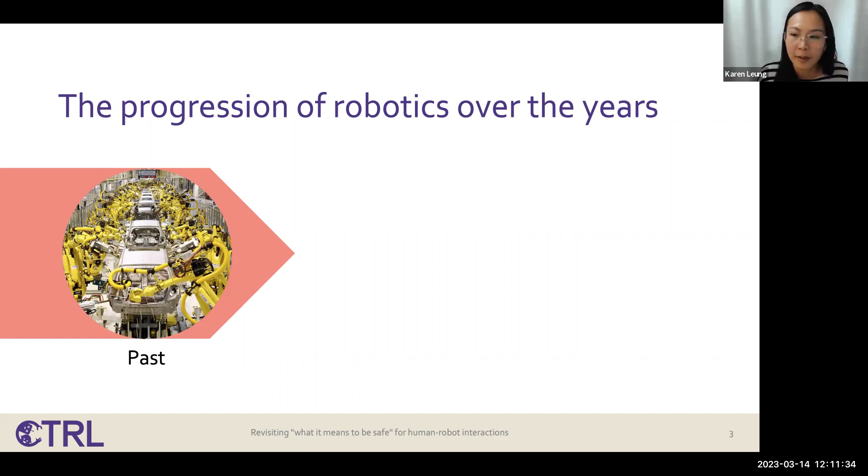And so I'm going to start with a slide that lots of robotics PhD defenses have had for the past couple of years, including my own: the progression of robotics over the years. Before, you see these massive robotic arms on the factory floor that are caged in, preventing any humans from entering. Now we see that they are operating near humans. I would say they're not necessarily operating in close proximity and interacting with humans, but they're definitely sharing the same space. But the task is still to stay sufficiently far away from the human, but follow them, perhaps, in the case of this probably Skydio drone or something.

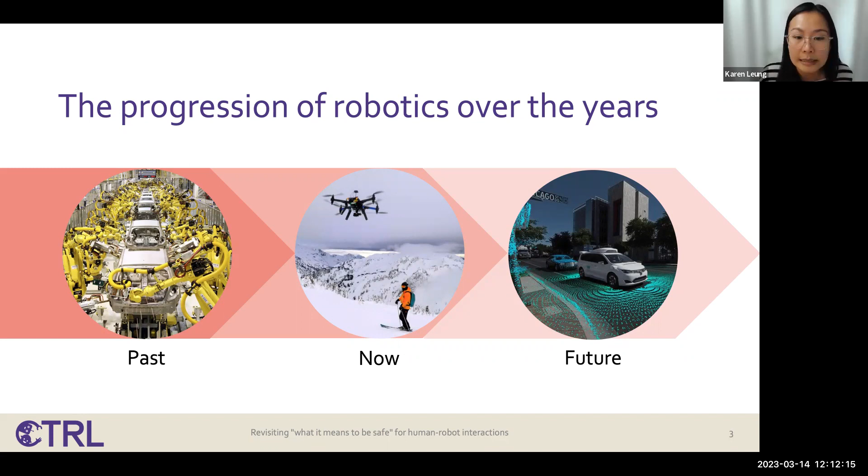But now, of course, as we move to the next generation, the next wave of robots, we want them to operate very close to humans. For example, in autonomous driving, we want autonomous cars interacting with human drivers and pedestrians and cyclists and so forth. So what does the next generation of robots need to have, or need to do, right? They need to operate in uncertain environments, interact with humans, and perform a variety of tasks. Again, these are probably things that you're all very familiar with.

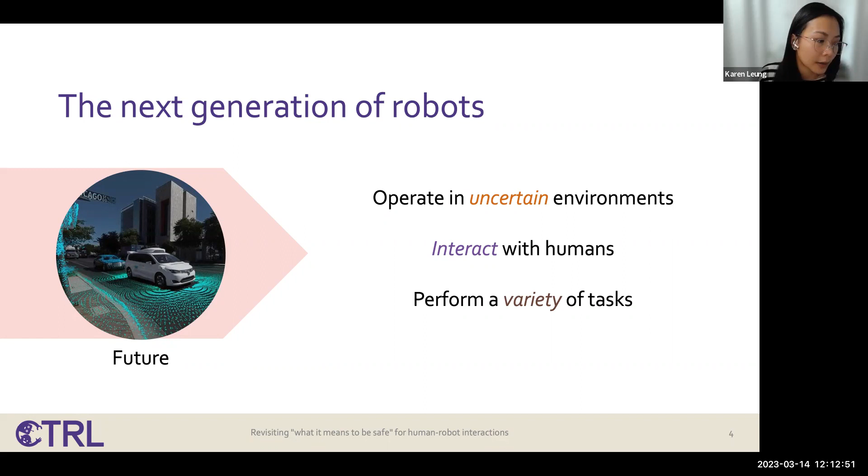And to put a bit more context to how I'm approaching this problem of designing the next generation of robots that can do these 3 things, I'm really approaching it through the prediction, planning, and control stack. So I'm not really going to touch on perception at all. But I'm assuming that within the autonomy stack, there are these 3 main modules: the prediction module, which needs to somehow predict how humans or the environment are going to evolve. This prediction is then fed into the planning module, which figures out a good path or trajectory for the robot to take, accounting for how the human might behave. And then this plan is passed into some low-level controller, which will track this trajectory as best as possible.

And so with this in mind, there are 2 questions I want to focus on in this talk. The first is, where does safety come in, right? Within these 3 modules, who should be responsible for ensuring safety? Should it be the prediction model, whose job is to be as accurate as possible? And if that's very accurate, then everything downstream shouldn't need to worry too much? Or should it be the planner that is taking these predictions and accounting for how humans behave? And if the planner is fully responsible for ensuring safe plans, then the controller just needs to blindly track whatever the planner wants to do.

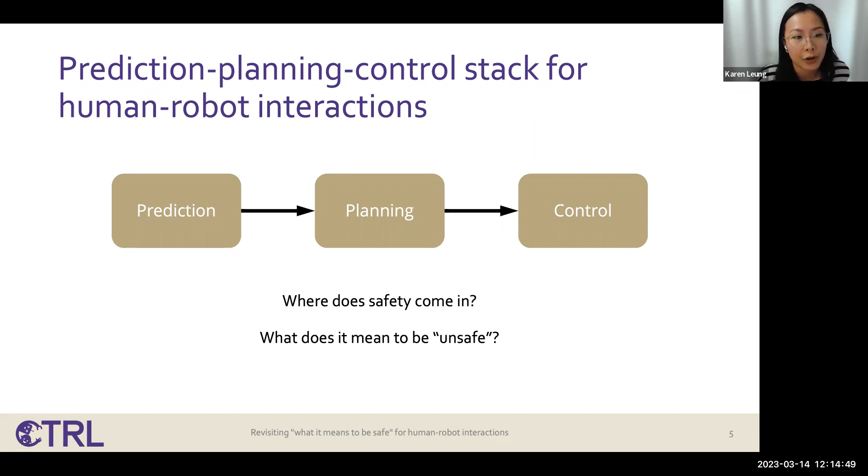Or should it be the controller that is really aware of these high fidelity dynamics, that is really able to understand the dynamic capabilities of your robot? Should it be the controller that is in charge of being safe? However, the controller is unable to fully reason about the uncertainty and the complexity of this shared human-robot environment. So the first question is actually, in my mind, not super trivial. It's actually not clear where safety comes in. Maybe the blanket answer is that it should come in everywhere, but maybe the question is how. And then the second question is, what does it mean to be unsafe? As I said at the very beginning, safety can no longer mean keep three meters away from everyone, right?

So what does it mean to be safe? Or alternatively, what does it mean to be unsafe? Because ultimately, you're going to have humans in the environment. When you're driving on the road, you actually drive very close to other cars. And so in some sense, you might think that is unsafe, but there is this level of trust or assumption that you have for other drivers to not collide into you.

And so the question is, where do you draw that line between, this other driver's gonna swerve into you, or they're actually gonna drive responsibly and stay in their lane. And so these are the two questions I want to explore.

Are there any questions so far? No, yeah, I'm good so far. Yeah, okay. It sounds a lot like the kind of conversations we've had within our lab. The different people in our lab are working on different parts of these three phases. Okay, awesome. That's good to hear.

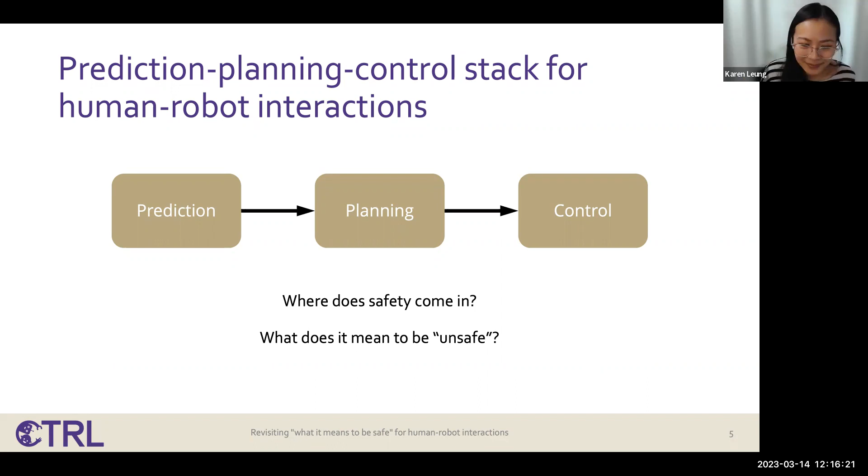Okay, so the roadmap here. So again, I'm going to talk about these two questions. So the first half is, where does safety come in? So I'll give a very brief introduction to HJ reachability, and then talk about the approach that I took actually during my PhD on how to integrate safety within the planning and control stack within a learning-based planning framework.

So actually, are you familiar with HJ reachability? How much? I just want to know how much detail or depth I need to go into. I think we're fairly comfortable with the idea of HJ reachability. I don't know if you guys want to disagree, but yeah. You can probably breeze through the equations. Yeah. Okay, sounds good. Okay, they're going to come up in a couple of slides.

Okay, so just to reiterate, the setup that we have right now is, you have humans and robots operating in this environment, and maybe the robot has planned a path based on the prediction that the robot has made for how the humans are going to behave. It has planned a path, but it is very possible that these predictions are wrong, right? You've heard that saying, all models are wrong, but some are useful. And this is the same for these learning-based data-driven prediction models.

I'm assuming these prediction models are neural networks, but in general, prediction models are not going to be 100% accurate. So it is very possible that these pair of humans that look like they're dancing could do something completely unexpected, or something that is not captured by the prediction model. And this will cause the robot to perform some emergency maneuver or drastically change its path to avoid a collision. And this will cause the robot to no longer be able to efficiently reach its goal, which is the target shown on the top right.

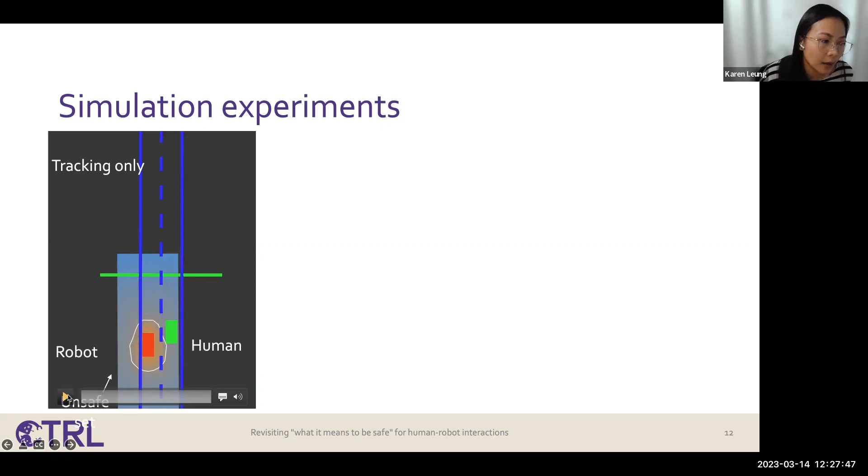You're going to see a bunch of lines coming from the human. Those are the robot's prediction of what the human's going to do. I mentioned before, I was using some neural network prediction model. And then you're going to see a line coming out of the robot, which is the robot's planned path, or planned trajectory. So I'm just going to play this video and then it'll make more sense.

And then you see that I swerve into the robot. I don't know how it is showing up on Zoom. Maybe it's a little choppy. It's not bad, yeah. Here I suddenly swerve into the robot.

And the robot actually tries to stop. You can see that the planned trajectory is red, so it's trying to slow down to avoid it. But the planning frequency is just not fast enough to really respond to these sudden changes to the environment. And unsurprisingly, a collision happens. And this is to be expected, right? This is the baseline nominal case.

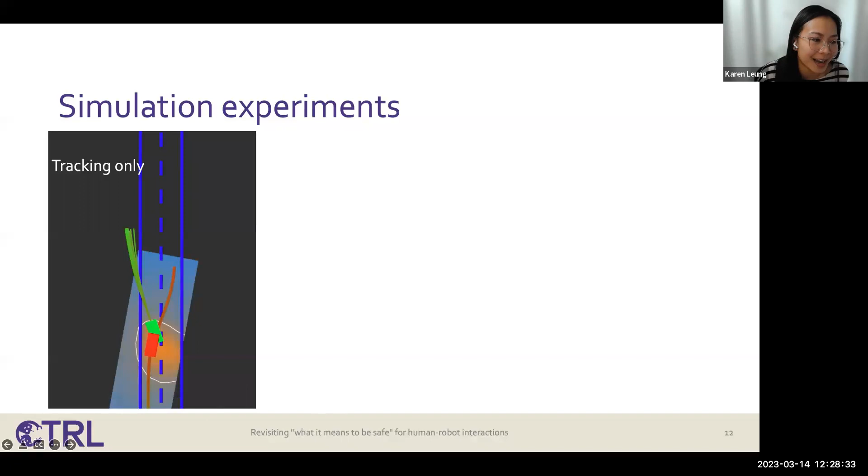And so you can see as I swerve, the red car is able to react really quickly because, something I didn't mention, the controller is running at a much higher frequency, right? The controller is running at 100 Hertz. It's able to really respond to these very fast changes in the environment.

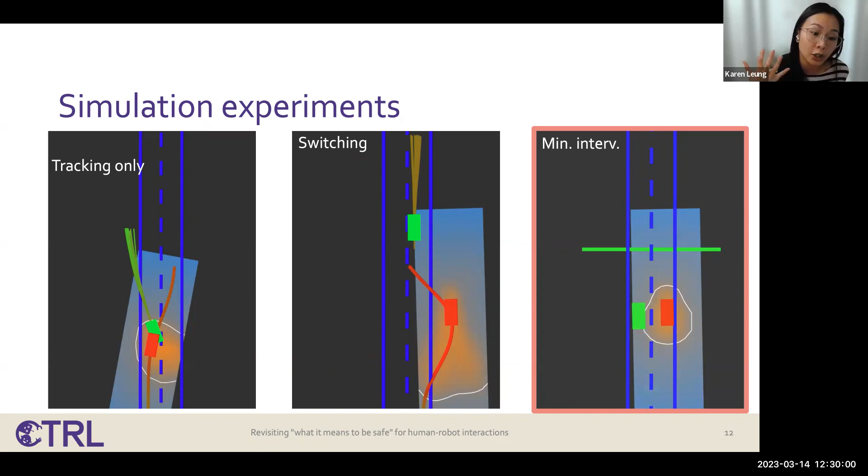And then finally, this is the approach that I'm proposing, which is to treat this HJ safety preserving control set as a constraint only when necessary. And this is able to ensure that the robot can balance performance and safety in a principled way.

And so you can see that the green car does swerve. The red car also swerves, but not as extreme, right? It swerves only to the extent necessary to stay safe, but very quickly it gets back on track to finish the lane change maneuver. Okay. Cool. And just to show, it's not going off the road that much. It does a little bit because it needs to avoid a collision, but it's not coming to a full stop or completely off the road.

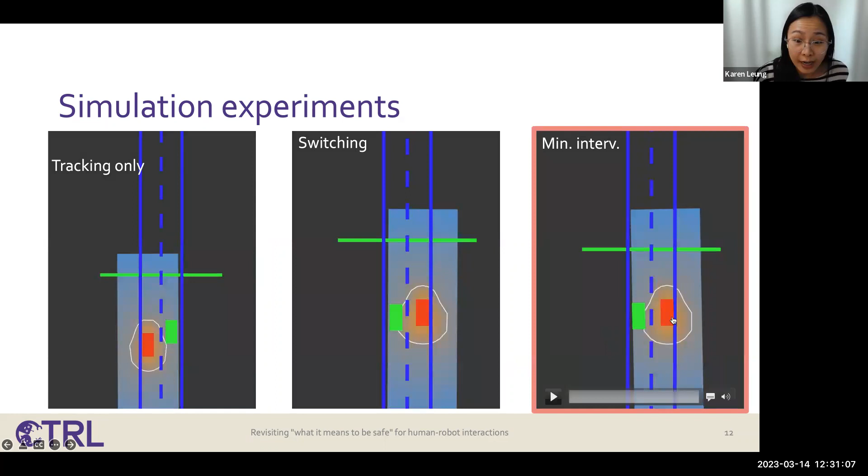And so that happened even though you're comparing against a worst case policy? Yeah, so all this is done assuming a worst case policy when computing the reachable set. And so you can actually see it's not great because these sets are very wide, right? They're so wide that if the green car was to edge a little closer to the center line, the red car's going to think it's unsafe, which is not very practical.

And this is a good point, and this is a good segue to the second half of my talk. Right? Can we loosen this? Can we relax this worst case assumption?

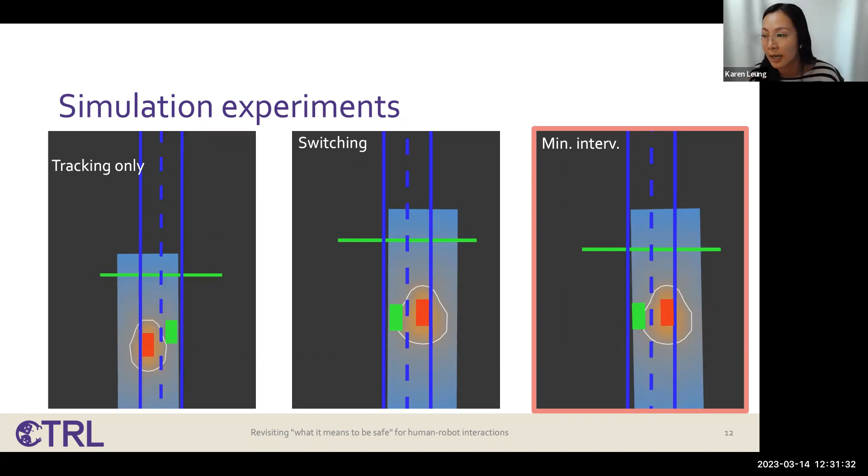Okay. So X1 is thinking that the RC car is as big as a normal sized car. Exactly. Yeah. So the RC car was really tracking the center of mass of the car based on our dynamics model. And so I ran a bunch of experiments on the car and did it for the three different setups, right? The tracking only, the switching, and the one where we're treating safety as a constraint.